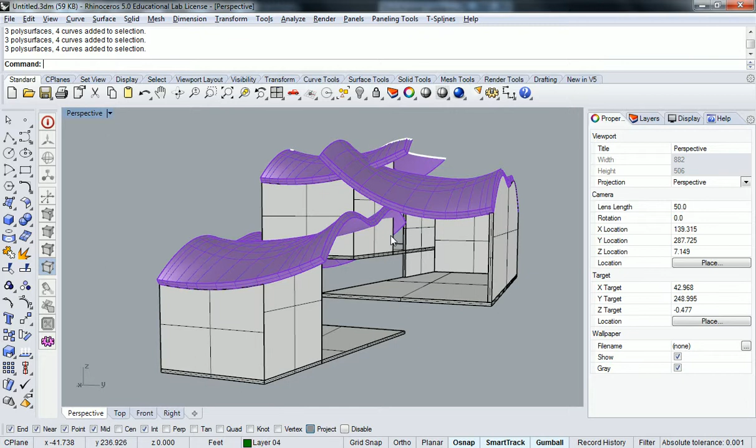All right, the next step is after you've gotten to a point where you've got your general overall spaces all sequenced out, it's really just a matter of trying to clean it up and get it ready for detail modeling.

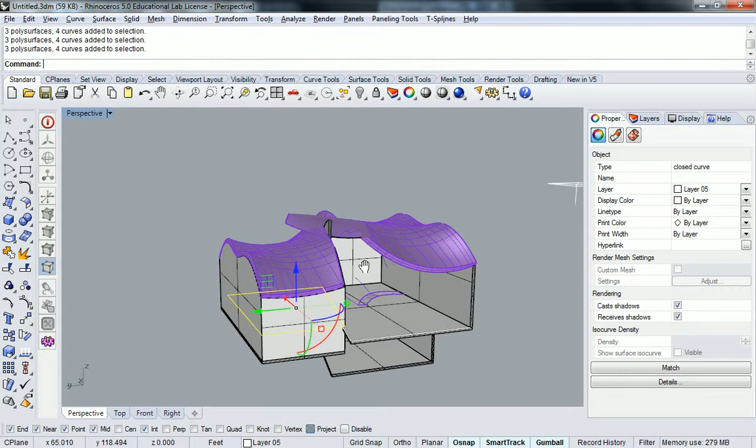The way that I approach that, if you look at my next step over here, is to create a series of curves like this in the footprints of my spaces and then use that to subtract out volumes. So you'll notice that when you look into the space here, I actually have my roof, as it comes down, being cut off on the inside of this plane. So that wall just comes up and the roof stops right there.

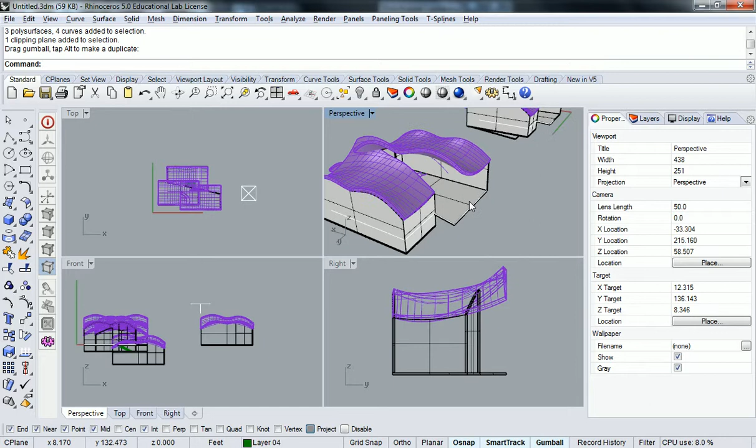And so I did that by taking a curve like this. Let me go back to the other one. I'm just going to borrow these, actually I'll do it fresh. I basically did that by turning project on, and I went to a new layer, layer 5.

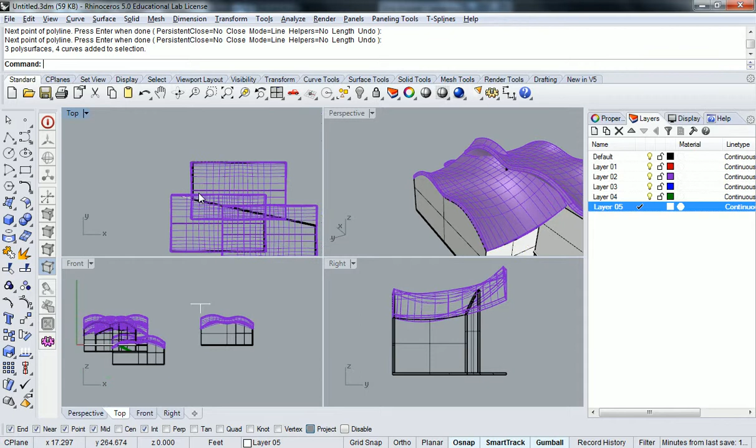I drew a polyline, and I just traced the outer edges of each of the package profiles. So that's one of them here, and I did another one on the other side, or you could just copy and paste it, but sometimes it's easier to just redraw it, all the way down to here, and then all the way back to here and here.

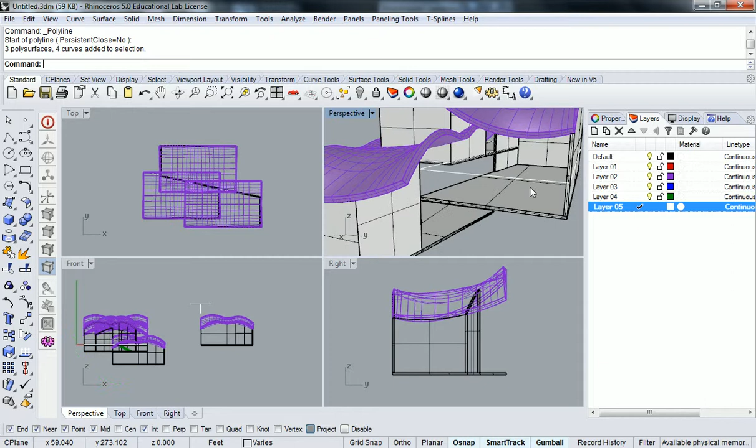Okay, so let me spin that around. All right, so these are the ones that I'm kind of looking at, right? So I've got a curve here that I'm going to use to extrude and trim out everything that's above it right here. I'm going to do the same thing over here and trim out the stuff that's inside.

But you'll have to be careful because sometimes the roof overlap gets a little wild, and this is where you need to think about what's really going to be seen, right? Because sometimes it gets messy. Let me show you what I mean.

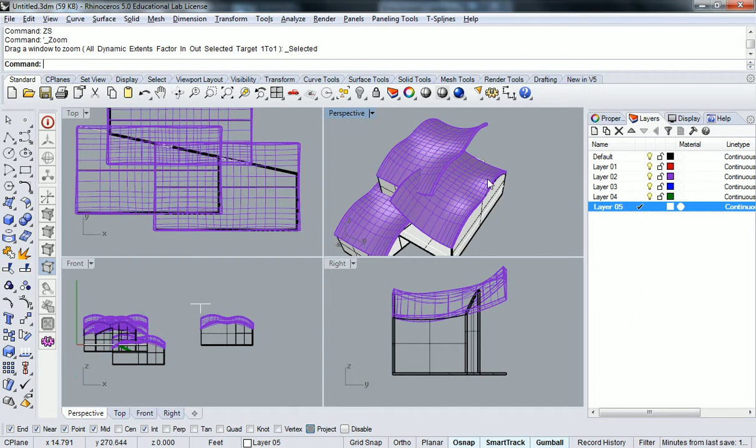So if I go to the top view and I look at this as an object, I've got my curve here, follows the profile around there. I'm trying to trim out this roof, and so my thought is I can actually just take this curve and trim out this excess right here, you would think. So that's what I'm going to do.

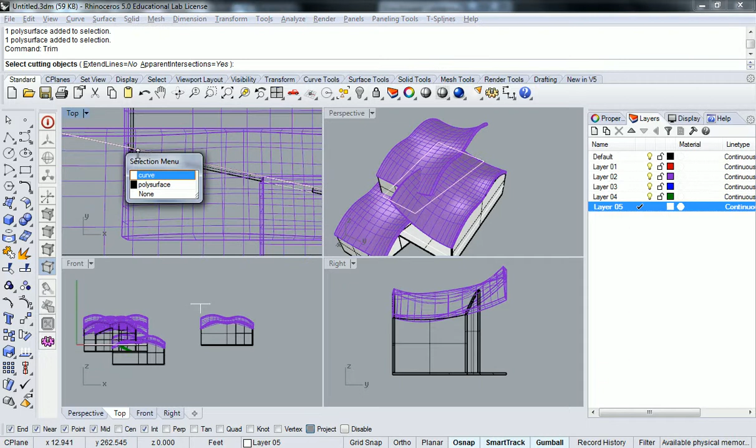I'm going to say, oh, you know what, I need to ungroup these. Sorry, these should be ungrouped so that you can select the roof planes individually. So if I do trim, I select the curve profile, hit enter, and I trim out that volume, right? It's kind of okay on the inside.

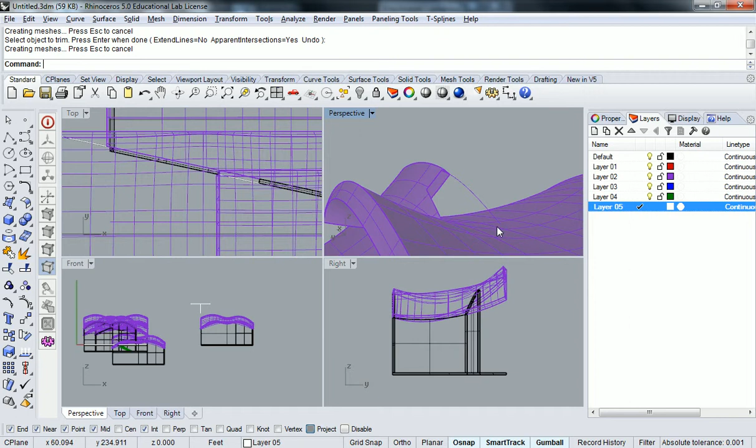However, I don't have an inside face, and there's technically an error on the roof above, because we want to have this actually sweep down properly so that the full volume is there.

So the correct option here would be to use an alternative, which is to extrude the curve and create a solid with it. And normally I just kind of pull it a little bit above the roof plane like that.

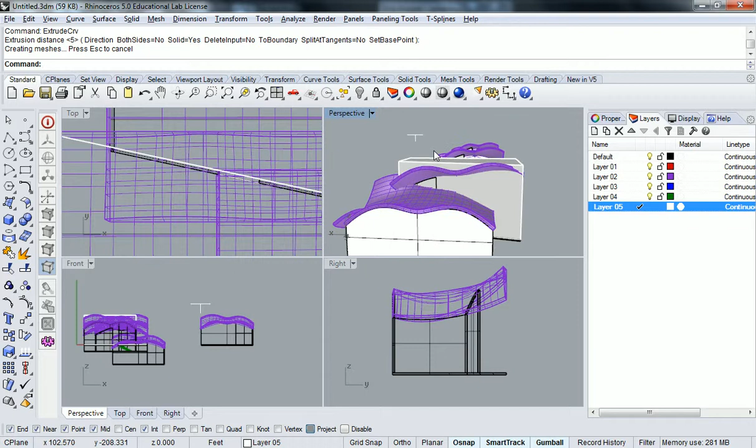And I start to think about, well, where do I really want to cut it? And I actually tried pulling this face back because I don't want to trim anything on the outside of it, but then I lose plane with the wall on the inside. So that's not correct.

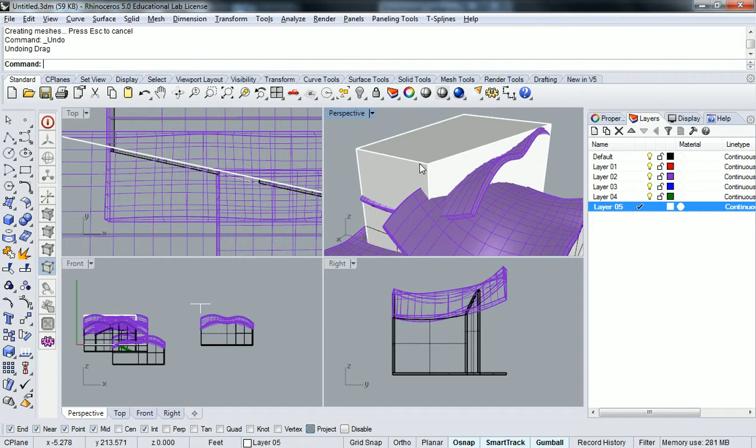So really what I want to do is keep this surface above the connection of the roof on the inside of the tall roof, and then I want to keep it below on the outside. So my solution was I'm going to grab this edge and pull it down to a point where I have all of the connective roof above showing, and then on the inside I've fully trimmed out the roof plane from here.

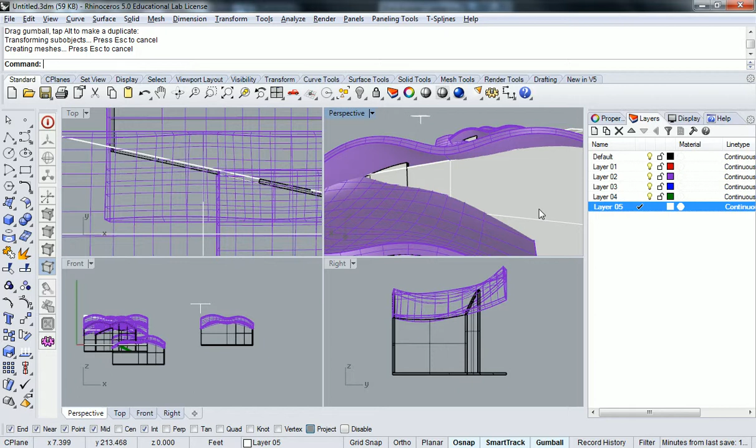And it might not be perfect the first time around, but you try to get it as close as you can. So then you do Boolean difference instead. Boolean difference, when I subtract from this using this volume, will actually give me the interior surface, so I don't have to remodel anything to get that edge.

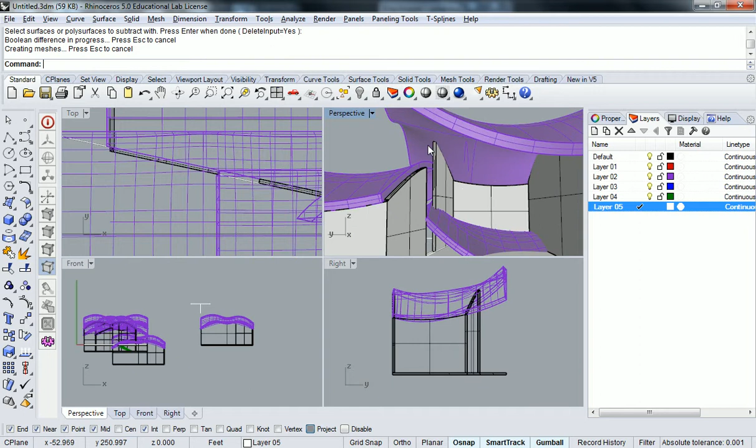And it looks like I approximated it closely enough so that I don't actually see any excess material underneath. And if you look at it above, you cannot see any of the discrepancies on the surface below. So that's about as clean as you can get it in that particular case with a warped surface like that.

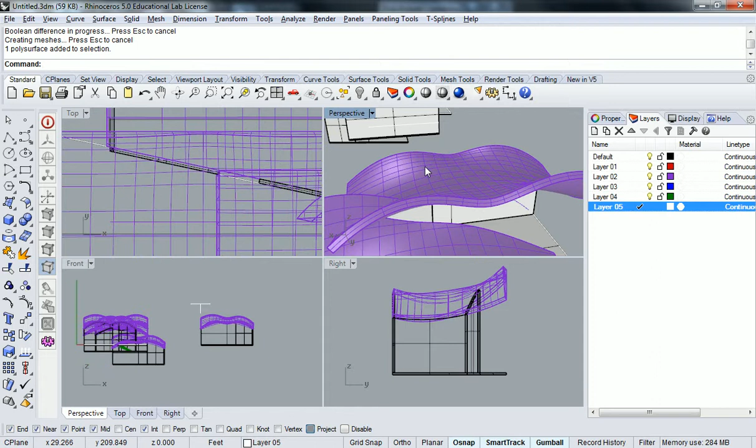Unless you're actually using this surface and a couple of copies of that surface to do your subtractions, so that option is available to you. On the inside, it gets a little bit different. Here, we actually want to trim out everything that's inside here and below, so we want to go up and down with that one. And then on this side, we just want to go up.

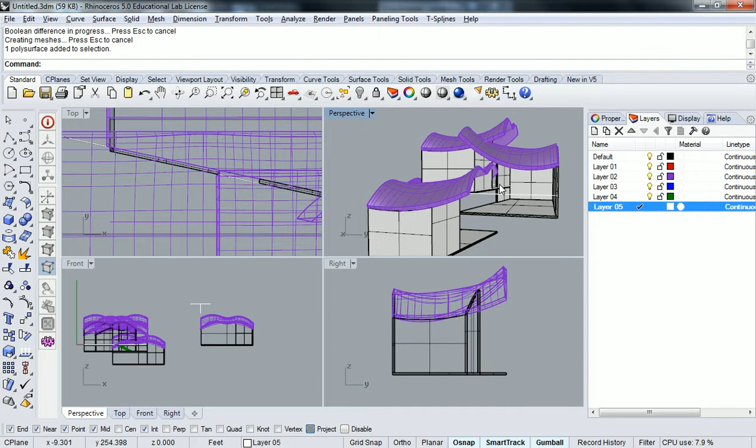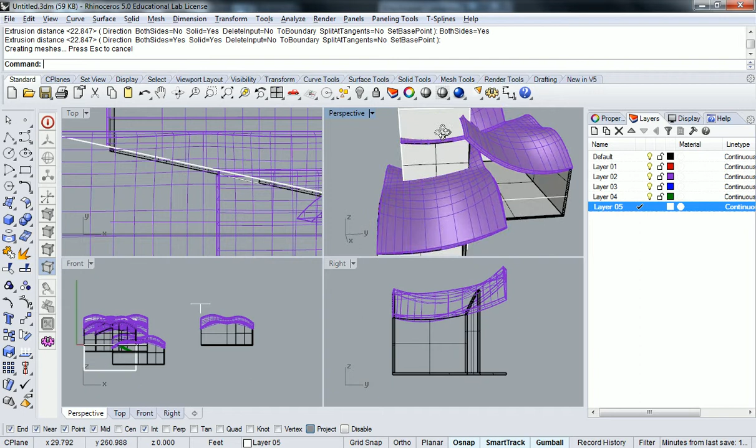And so that should get us what we're looking for. If I grab this curve and do extrude curve, I'm going to switch to both sides. I don't think you have to worry about the height of it because it's all encapsulated.

You already know that whole exterior profile is going to be cut out. Additionally, this curve, all you need to do is extrude it without both sides, just make sure you're clearing the height. Let me turn project off. I just need to pull it slightly above, and if I use both of those to trim this roof, that's our start.

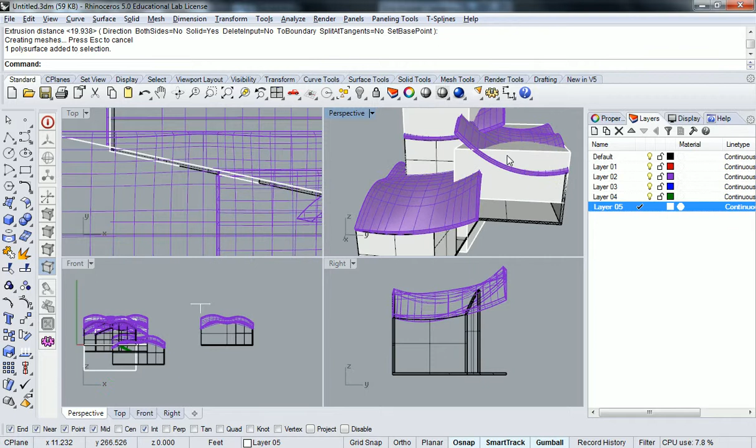So then I say Boolean difference. From this surface, I'm going to subtract both that and this. Now I have a clear floor space inside here. If you spin it around, you've got a totally clear inside space. You've got your roof dipping down on the exterior of the building, so that's fully encapsulated once you finalize it with a wall.

So there are a number of different ways you can do this. None of them are perfect, but I think I've provided you enough tools to approach these complex conditions now and figure out ways to clean up your model.

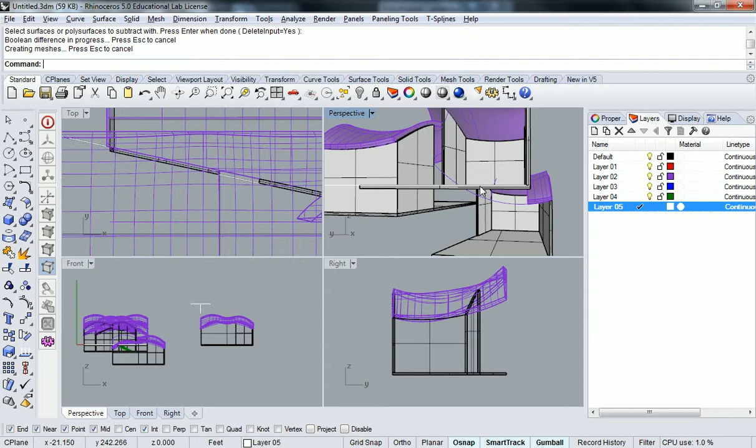So that's step one of the next phase. The other step is we're going to start getting into more detail, and we're actually going to be creating connections between these spaces.

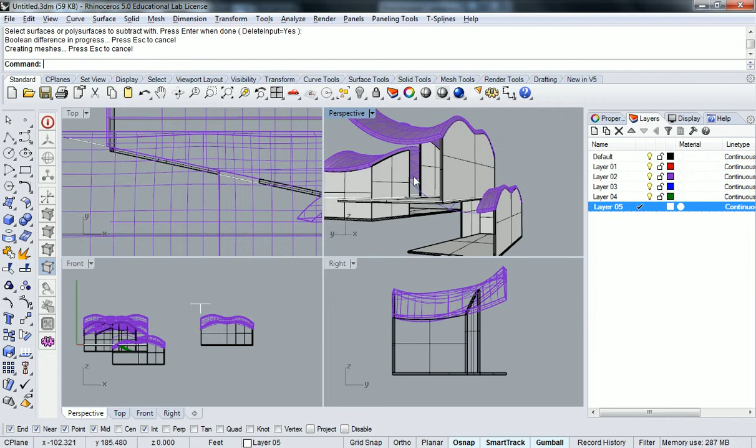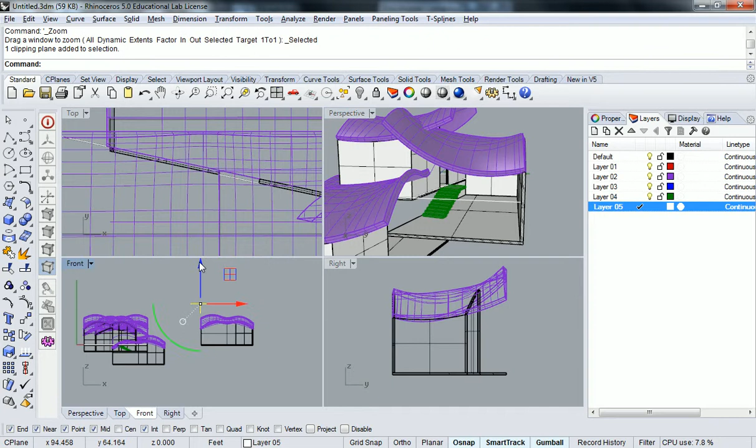The point I want you to get to before class on Monday, because we're off on Wednesday, remember that, we're off on Wednesday, is, if I jump over to my other model, I did this one a little differently so you'll see some excess material, but I want you to get to a point where you're actually beginning to create vertical translation, essentially installing stairs into your model.

For me, I kind of did this. I'll show you the way I did it. It's a little more clever than you might be used to, but because it's on a skewed angle, it was easier to not worry about designing the stair and then rotating it into place, which you can do. You can design it on the side and rotate it in.

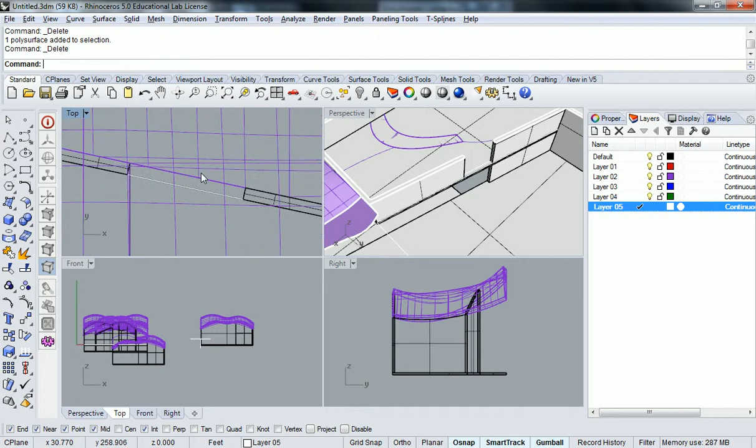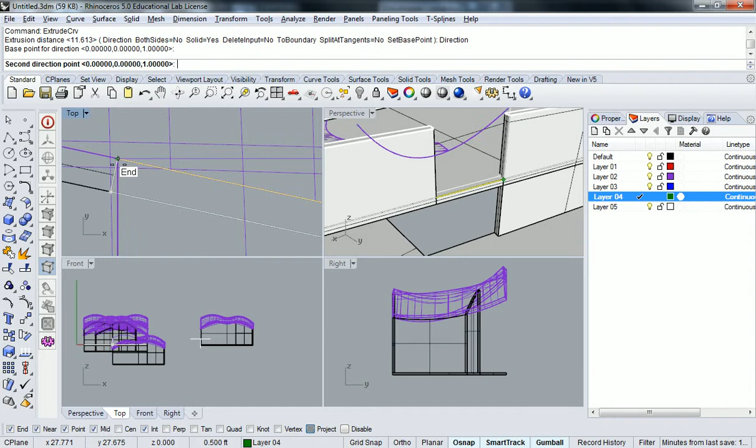But I decided I'm going to start by drawing a curve. It's down here, going inside the edge of that door, and I said extrude curve. My direction I set from here to here. Project is on. Direction from here to here, and then I pulled it out and said 5 feet. That gave me a plane.

Then I selected that and said extrude surface, -6 inches. Then I grabbed the front face and said extrude surface, and pulled it out.

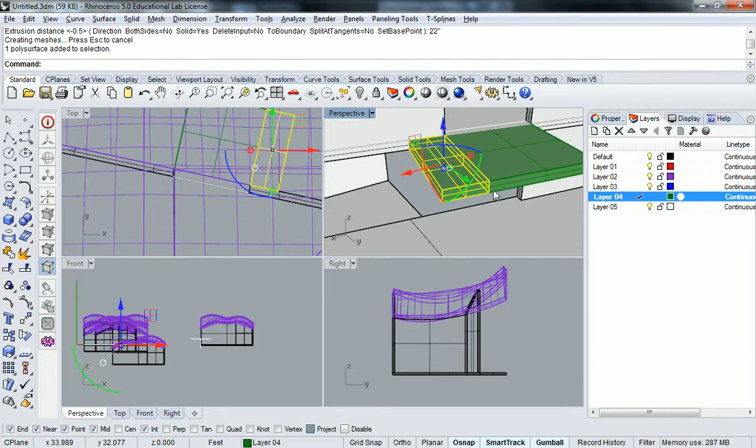Did we do 1 foot increments, or did we actually make them 22 inches? It should be 22 inches. Then it was as simple as taking that step and moving it using the midpoint technique I showed you before. The midpoint goes down, and then you just copy and paste, or you could do an array, but at this point it's only a couple of treads, so I'm just copying and pasting my way down.

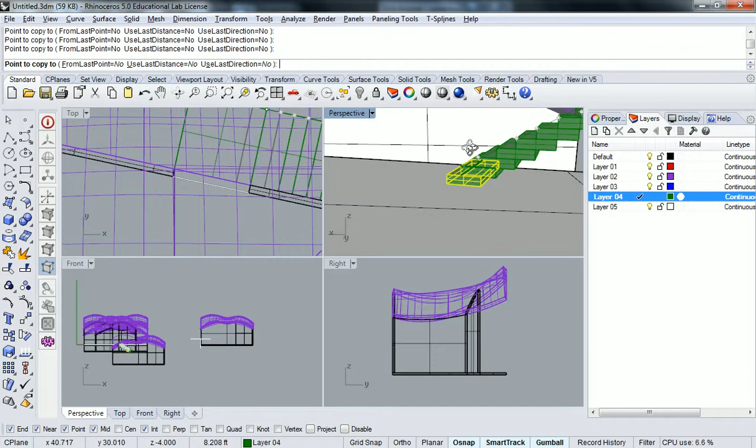One more. And that creates your stair. So you don't have to rotate it into place or anything like that. It's a pretty autonomous process using the features of extrusions.

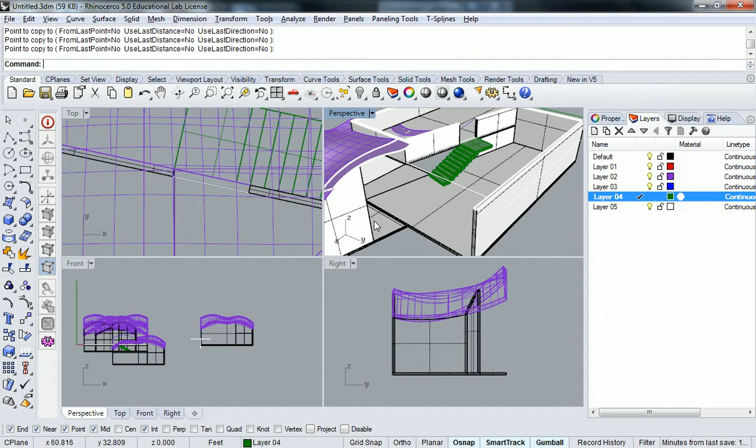So the goal is to make sure we've got vertical translation between them all. Then you'd have to put another stair into your bottom floor if you're doing 3 different levels connected to one another. So please talk to me if your condition is any different than that. What questions do you have about the requirements for Monday's class?

This is the level of progress you'll need when we begin class on Monday, so that doesn't leave you too much time tonight. There is lab time available to you. But I'd suggest, even if everything's not perfect, it would behoove you to simplify what you're trying to do now and get this done by Monday, because we're going to start getting into some serious detail.

Are there any questions? Did you specify the dimensions between the floors? Nope, that's up to you, all designed. The distance between floors, the location of them relative to one another, that's all up to you. Remember, when I gave you all the options for how you can lay it out, they don't even technically have to be attached. If they're not attached, what I'll request is that you have some vertical elevation gain between them and you're connecting them with stairs.

Could we have a series of stairs that are surrounded by just like a tall wall or a really short wall? I don't know what you mean by that. If you could sketch it for me, I'll check it out. Sure. All right, so I'll be around, I'll be helping you guys out.